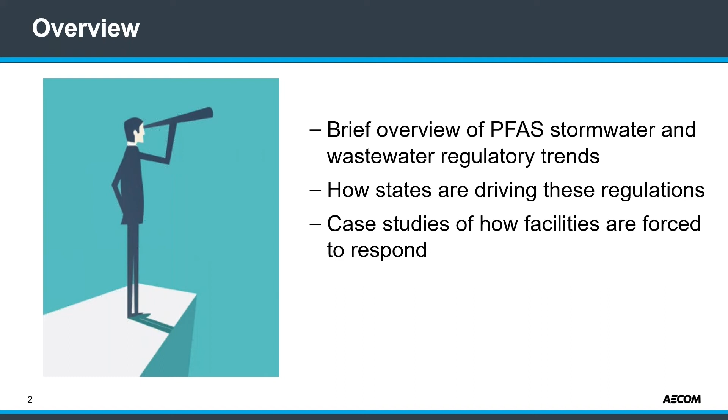So let's jump right in. I'm going to start off at a bigger picture on the federal level with the EPA. The EPA has become more active—their action plan was out a few years ago. It got off to a slow start, but especially with the new administration, things are moving along at a much more rapid pace now.

About a year ago, the EPA came out with this NPDES interim strategy. I'm sure many of you had seen this. This was a document they were discussing internally as they looked forward with how to handle primarily effluent streams through NPDES permits, whether stormwater or wastewater. The recommendations for wastewater discharges were largely best management practices, which could also include treatment. On the stormwater side, they were looking at how to control stormwater and treat it if necessary.

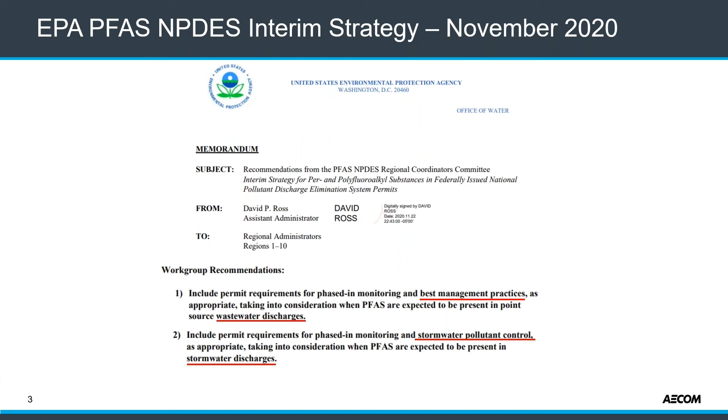More recently, released just a couple of weeks ago, were the preliminary effluent guidelines, this Program Plan 15 by EPA. You can find this in the federal register if you just Google for it. Basically, they're looking at limiting the effluent and providing these guidelines.

If you go through this, it talks about what may be required for monitoring, best management practices, and even pre-treatment standards for wastewater. It also goes through some of the industries they're keying in on and where their focus is, and there are categories too, like for metal finishing, that they're also addressing.

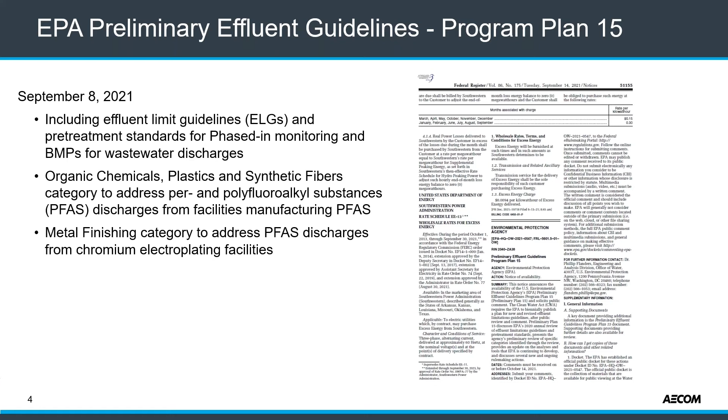I always like to try to figure out where things come from and what happens. Something that kind of went a little bit under the radar was this document that came out by EPA. This is really the background resource to Program Plan 15, and it's actually a pretty interesting document. If you're interested, you can Google this.

I just pulled out one of these tables here. This document goes through and talks about who they're focusing on and why, and specifically what aspects of the manufacturing processes they're concerned about PFAS being in. A lot of this we knew before, but a lot of it is based upon a whole series of studies that have been done in all these different areas. So this is all just to say this is a backdrop.

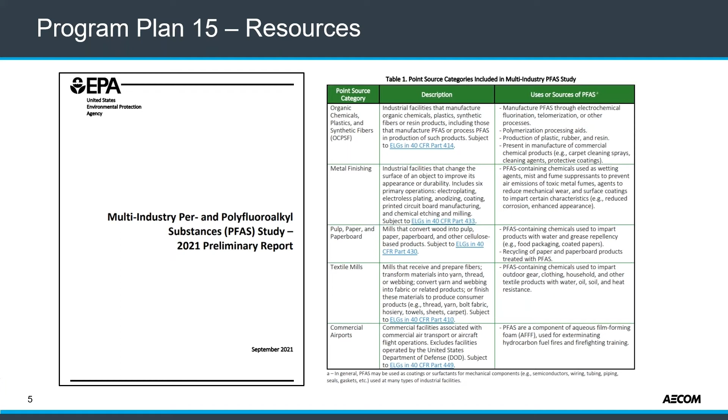On a federal level, this is being looked at, and this probably will be rolling out. My guess is in not the too distant future we're going to have a lot more uniform regulations on NPDES with our effluents, especially the surface waters.

So the federal government is the federal government, and things haven't really been driving PFAS issues as much. I really find that it's being driven a lot more on a state level. The difficulty we have with that is all of these states are doing different things, and some have been very aggressive on PFAS. Some are just becoming aware of it, and some aren't really dealing with it, whether because they don't think they need to based on manufacturing in their states, or they just haven't been pushed to yet.

Here's a figure showing the United States, with a whole bunch of colors - hope it doesn't weird people out. I tried to break this down to show: the gray ones are states where they're not really doing much of anything yet for PFAS. I'm not talking about products or foams, because some states are very active on the product side but not as active on the environmental side.

The green ones are states that are getting close - they're drafting regulations, coming out with recommendations that are in various forms of review or stakeholder comment periods. The dark blue ones are states where there's some sort of PFAS regulation. In some states it may be drinking water, some it may be just environmental, it could be biosolids - it's very varied. So all these states don't have the same types of PFAS media that they're developing criteria for.

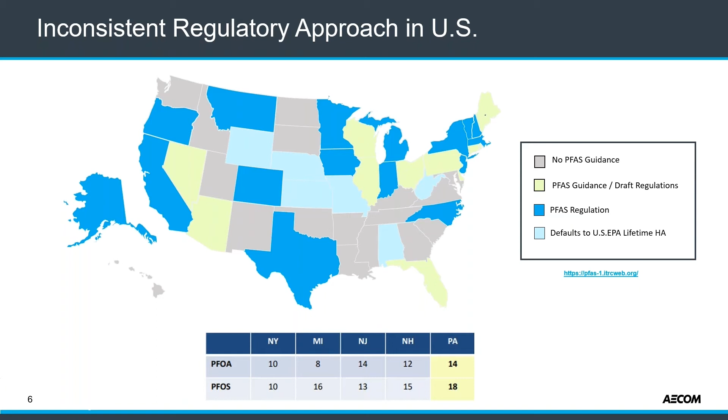A lot of what I want to talk about today comes into this - what people care about most is how are these states driving these regulations and how is this coming about? So for reference, I put on the right-hand side the DEFCON scale. There are three areas I'm going to talk about today, really focusing most deeply on number 2 and number 3.

We all know that many states are now approaching PFAS by facility types. There's been a lot of information out there over the years about different types of facilities and their association with PFAS chemicals and their manufacturing processes - that's been well documented, I'm sure everybody knows that. It's a concern, and it's definitely something that can have a regulatory driver behind it.

But I really think more concerning has been the stormwater effluent and attention now given to NPDES permits - that has a lot of problems for us, a lot of challenges both in assessing that and in how you rectify it. And then there's the one I think is DEFCON 1, which is quote unquote 'war ready' - stuff we're dealing with day in and day out in many states where there are requirements now we have to meet for effluent. That's definitely challenging in wastewater, which I'll get to.

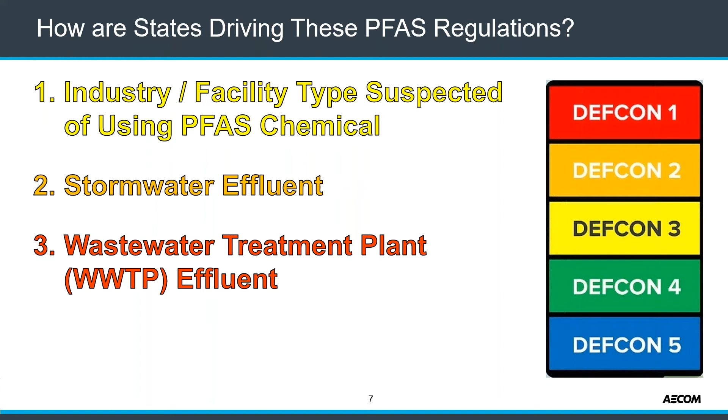Okay, so let's talk a little bit about these facility types. I'm not going to spend a lot of time here, it's pretty straightforward. There are definitely different industry types that have been targeted through research and documentation of what they've done, what's in their waste products already, and what's been used - probably none of these surprise anybody on the call. So many states are developing lists of these different facilities within their states by industry type, and when they have the authority to, they often ask for some sort of sampling to be done at these facilities or evaluation.

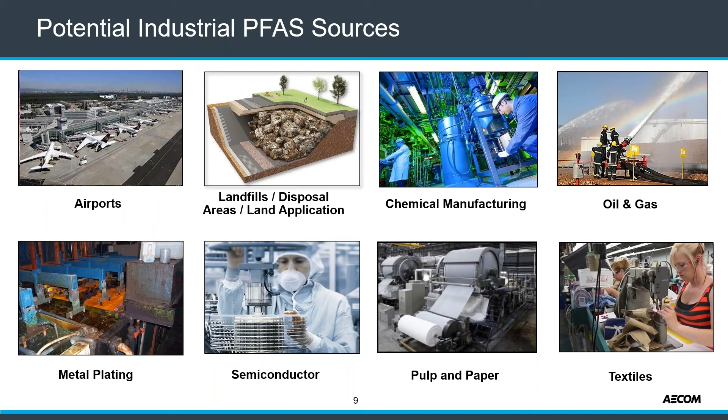A couple examples of this: in California, they entered the PFAS theme a little bit late, but they came at it with a robust charge, rolling out this phased approach. A couple years ago they had phase 1 come out, driven by municipal sampling done throughout the state. I should mention, that's something we need to be very cognizant of - when we see states starting statewide sampling events of municipalities, drinking water, or surface waters, once they get that data, they have to figure out what the source may be and how to get it under control to protect human health and the environment.

So California came at this in a phased approach. First they hit airports and landfills, and they got completely inundated and overwhelmed with the response. It took them a while to staff up and figure out how to attack that. A good year later, all of a sudden they had another order come out for chrome plating facilities - I believe there were over 350 of them that were part of that order.

And again, they had to go out and assess their facilities for past PFAS usage. Generally in the chrome plating industry, that was well known for being a mist-suppressant to control vapors from their employees. It also has historical roots in that industry as well. It definitely had beneficial properties to the surfactants in the application of the chrome to the materials that they were plating.

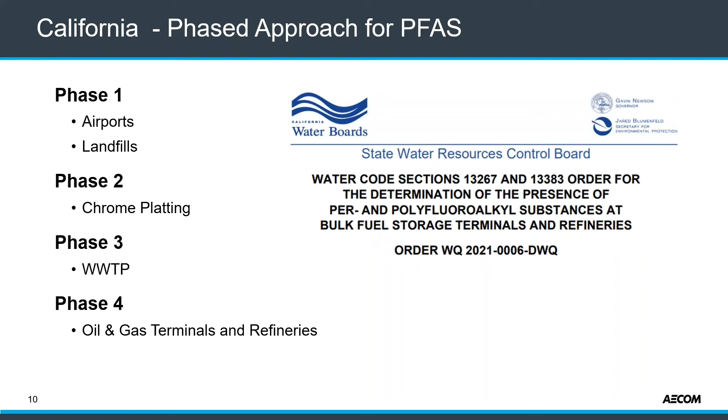And we saw New Jersey just did this year too, where to many of their industrial facilities throughout the state, manufacturing facilities, they put out questionnaires about PFAS, and that one was extremely extensive. I helped many clients navigate through that as well. So this is all just to say that this is becoming an ongoing issue, potentially for how sites can get identified.

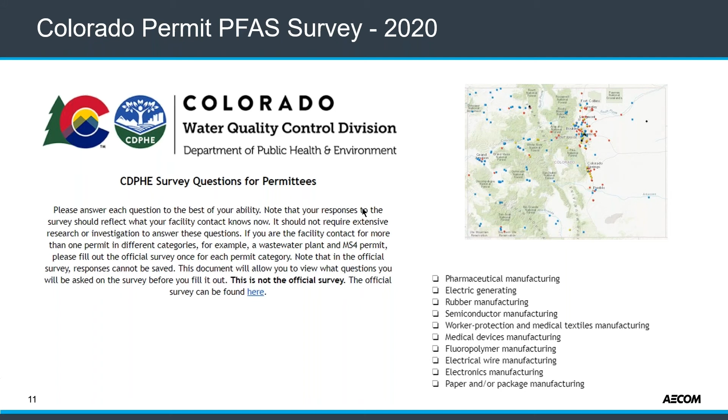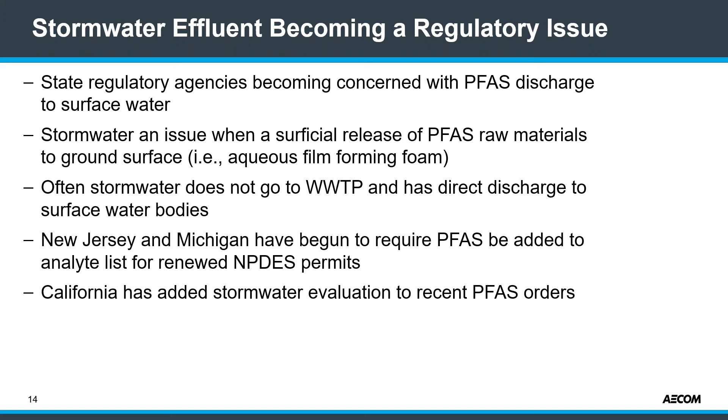And I mentioned California before with their orders. I've noticed that some of the more recent orders are focusing a lot more. They have a very large stormwater component to it, where they do want that evaluated and that stormwater sampled as part of an initial, just a preliminary evaluation. They want the stormwater sampled even prior to you recognizing that you do or do not have a release of any PFAS raw materials at your facility.

So be that as it may, however this ends up in our stormwater, this is presenting a lot of challenges. I kind of joke sometimes, it doesn't seem like anything with PFAS is easy. And we're learning new things every day.

But when you're addressing this impacted stormwater, what options do you have? So options that I've seen and we've implemented at facilities - if we do have impacted stormwater, sometimes we've been able to divert that to a wastewater treatment plant on site. Well, that's just directing it somewhere else, and then we have to put some kind of mitigation in place for that. But sometimes that's a little more of a controlled environment where we can do mitigation if necessary. But that's something that's been done.

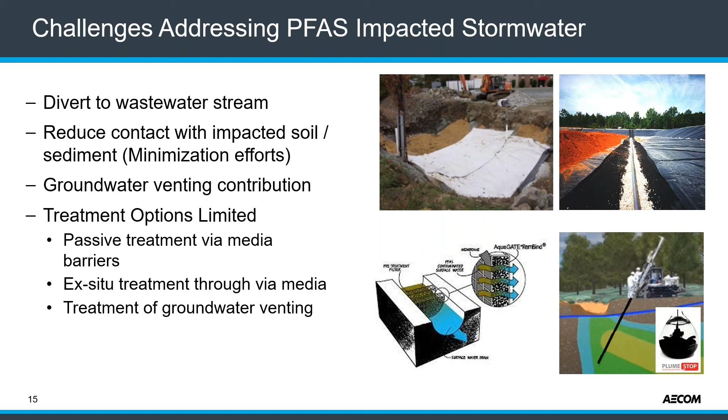And then the last thing we have, which is kind of like everything else, is pulling stormwater out of these culverts and running it through carbon, or fill in the blank, some sort of adsorptive or separation technology to remove the PFAS and then discharging it. Again, none of these are phenomenal answers, but there are ways in which we can do this. This has only been something I'm aware of being dealt with in the last year and a half or two years from a stormwater standpoint.

So one quick case study I have is the Selfridge Air National Guard Base, where we had notices of violation due to an outfall having elevated PFAS concentrations in a stormwater outfall. Those concentrations could be as high as north of 10 parts per billion for PFOS, typically one of the driving constituents in PFAS that we have. So we had to really look at this and do some modeling and figure out where this material is coming from that's getting into the stormwater, where that's migrating, and what the fate and transport looks like, to figure out what we could do to address that.

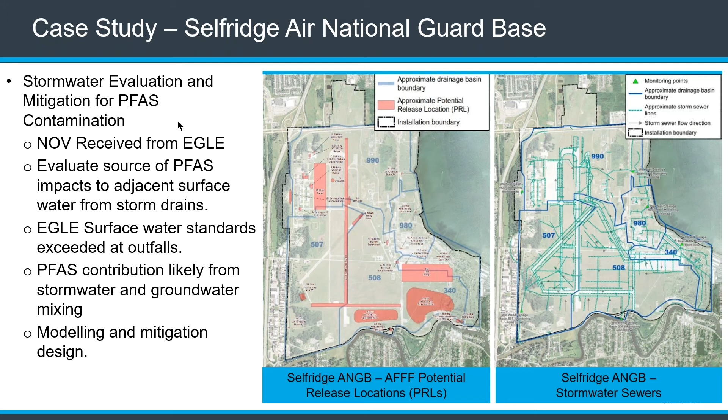So at this particular facility, we are basically removing the water from the stormwater drains themselves, the culverts, and running them through separation media. We're still in a piloting phase on this, trying a couple different carbons and a Fluorosorb as well, to see what type of removal we get with all these, what's more beneficial, what's more cost effective.

Through all this, we need to be minimizing and understanding where the contributions are coming from at the facility, because if we cannot treat the end tailpipe, that's going to be better. We'd rather treat farther upstream and lower volumes rather than handle much higher volumes. The study identified that most of the contribution of PFAS was from 4 individual catch basins, so they're being dealt with individually to take care of that. It's a very interesting project, and the results have been very strong. There'll probably be more documentation coming out on this in the near future.

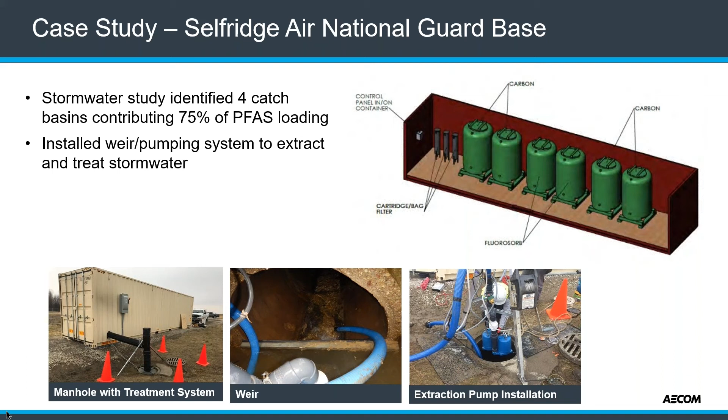So let's switch over to the last topic here, which is wastewater effluent. I'm not going to say Michigan is the state that really drove all of this, but Michigan is the state that I think really came up with a very effective plan to identify where PFAS is getting into wastewater treatment plants.

And obviously the driver is, so this is how it goes: the state has had a surface water quality number for, I think, over a decade for PFOS and PFOA, and the PFOS concentration was 11 or 12 parts per trillion, depending on if it was a drinking water source or not. That was the discharge criteria. So Michigan then went to the wastewater treatment plants and basically told the plants, listen, your discharge from your plants has to meet this.

So we are requiring you under statute to sample your influent and effluent. Basically, if your effluent exceeds, we're requiring you to sample your industrial influent coming from industry to determine if you can find out where this PFAS is coming from. That worked out well from the state standpoint, because it did identify hundreds of facilities in the state of Michigan where PFAS was being discharged to the wastewater treatment plants.

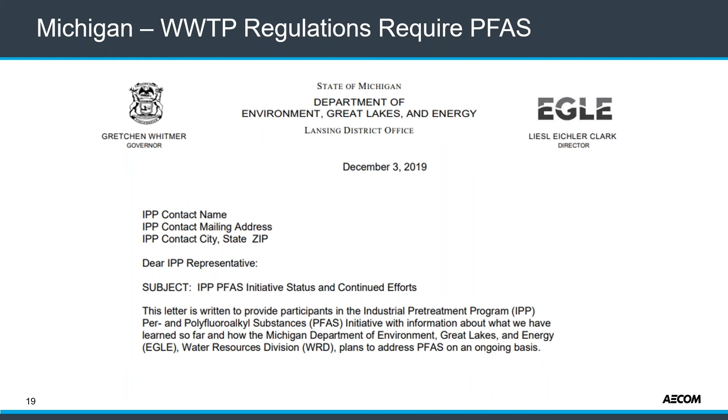So here's a state that had a regulatory driver for it. Many states really started to try to develop and model a program similar to what Michigan did, and Wisconsin was one of them. A while back, Wisconsin tried to model this, and they put out basically a request for wastewater treatment plants to sample their influent and effluent. Wisconsin does not have a regulatory driver yet. They're working towards that - their regulatory process for developing new criteria is very onerous. It takes a while. It'll probably be within a year, sometime early next summer, when that promulgation process will come to an end and they'll be able to actually have the driver.

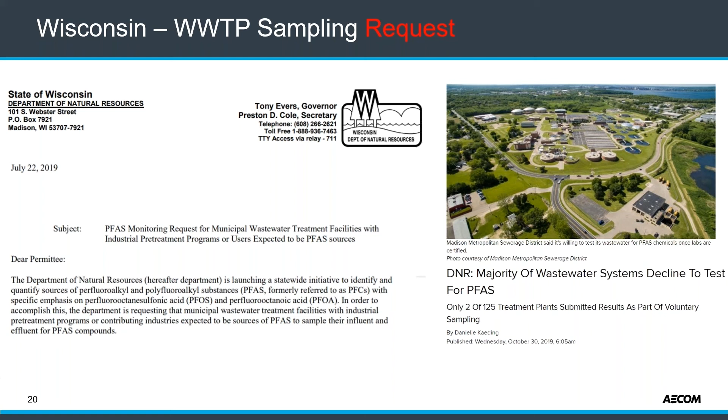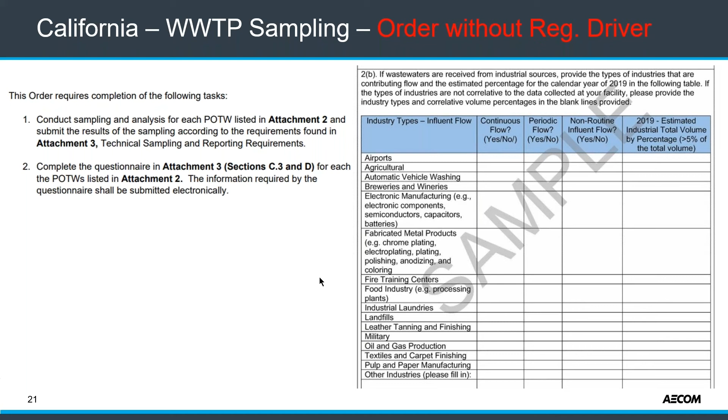And again, I mentioned earlier the California wastewater sampling. They're requiring this without necessarily a regulatory driver for it yet, because data's being collected and nobody really knows in California what we're comparing it to at the moment, be that as it may. But you can see this huge list of who they want you to target if you have issues in your water, and they're already teeing this up for all these wastewater treatment plants there. So that's definitely problematic for industry, not knowing when this may just become your problem.

So how do we address these issues within our wastewater? I think there's a lot of keys that need to happen with that. There's a lot of challenges.

First, we really need to identify what the contributing sources are in the facility. Do we know which parts, and some facilities are quite large, have PFAS, or had historical PFAS that's just impacted equipment that's still discharging? Can we isolate that and understand where that is within the facility? And then if we do, are there minimization efforts - things we could do to stop that PFAS from being discharged to this stream?

Sometimes that may be difficult. Part of that minimization effort too may be looking at alternative products or materials that could be used in your process that don't have PFAS, or at least don't have the PFAS that have been found to have environmental concerns. There's also the cleaning of equipment.

We run into this a lot where, once PFAS, especially a raw material, hits your equipment - let's say, for example, in chrome plating, in those acid baths where this was sprayed on top of - it's virtually almost impossible to remove PFAS from that equipment itself. Many facilities are faced with either treating an effluent coming out of their facility or replacing all of their equipment. These surfactants tend to bind into things, whether it's metal or concrete. This could also be for your wastewater treatment plant piping or your wastewater piping at your facility, which can become impregnated with that too.

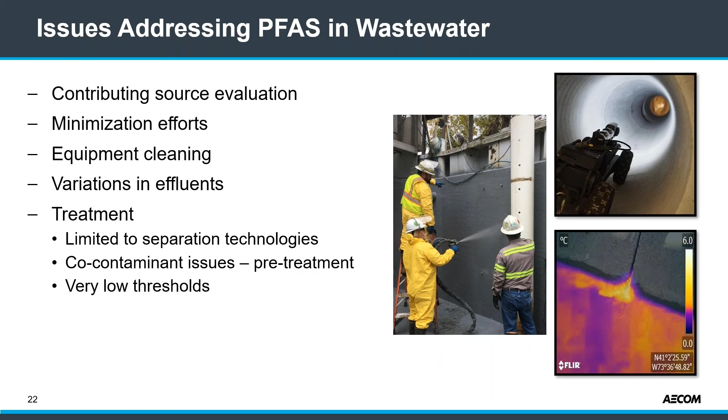So I have a case study on this - I've used this for a little while, it's a good small case study to talk about. We had been working at this former chrome plating facility for a number of years, and we had a groundwater extraction system pumping out groundwater leaving this former facility and sending that water to the wastewater treatment plant for treatment of chromium and nickel primarily. The wastewater treatment plant would knock out all the metals, and everything's good, and we have a capture protecting these down-gradient residents.

This was in a state where they required the wastewater treatment plant effluent to meet the state's criteria. It didn't, so they sampled their influent streams, and sure enough, this influent from the groundwater extraction system where we were knocking the metals out had 8,000 parts per trillion PFOS during that sampling. That led to a cease and desist letter from the wastewater treatment plant, giving them a timeframe - basically you have 45 days to rectify this, or you can no longer discharge.

So we had to move very quickly to put in a GAC system that had some resin in it to knock out metals as the pre-treatment. We ran a sacrificial carbon on the front end, regenerated carbon, and then went to full carbon for polishing on the back end. We had to build that and have it in place within 30 days, and we were able to rectify that. We can do this - it's been running for over 2 years now with our effluent at less than 2 parts per trillion.

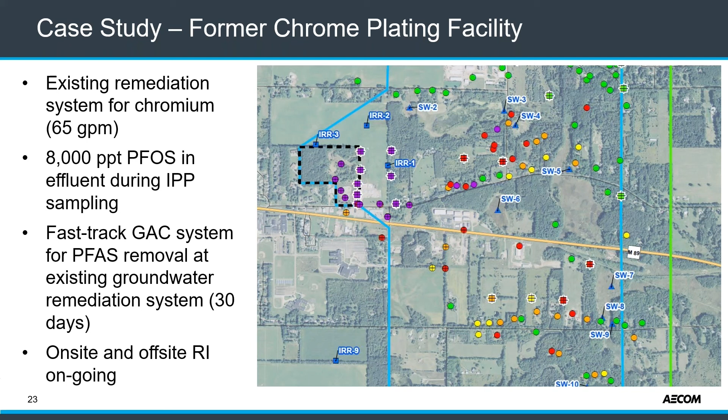But then this leads to a whole host of other issues where we had down-gradient residential wells with elevated concentrations we were dealing with. We're doing this off-site investigation - we got discharge to surface water bodies. And just to make it fun, right next to the facility we have a dairy farm, so they had water going to cattle. We had a bunch of irrigation wells. So once PFAS comes to you, you kind of lose control of it, and these are some of the issues we're stuck with.

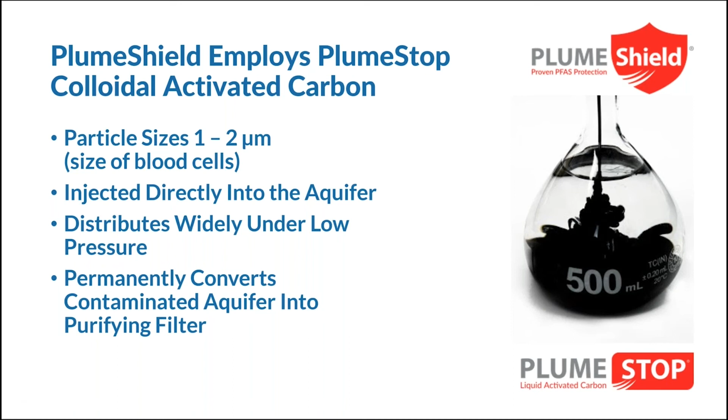We've actually targeted this very well right into the flux zone. So now you're stripping all the PFAS out, and down gradient to the left, you've eliminated any risk of contamination.

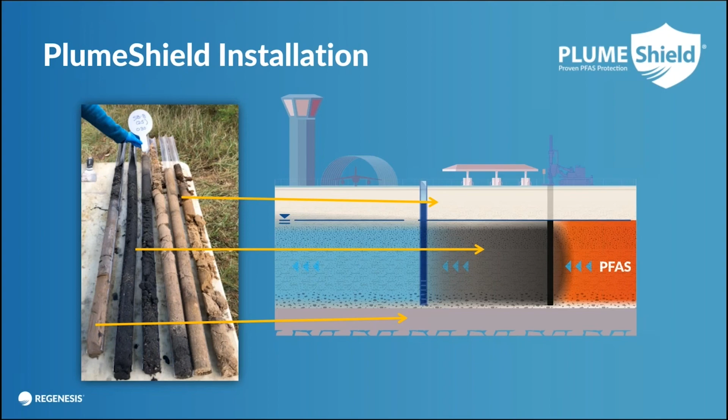So you're protecting the wells to the left of the barrier. We call it a barrier, but it's actually just a permeable barrier, a filter zone. And all of the PFAS is being stripped out, and you have clean water impacting those wells. So you're protecting the homes to the left with their domestic water supplies.

So one of the questions that comes up is, are you really performing remediation since you're not just removing the PFAS? Instead, the PFAS is simply sorbing onto the Plume Stop in the subsurface.

Well, remember that risk is equal to hazard times exposure. And by putting the Plume Stop in the subsurface, it rapidly sorbs the PFAS. And by doing that, you eliminate the exposure because it's no longer moving. And by eliminating the potential for exposure to down gradient, you are in fact eliminating the risk. And by eliminating the risk and cutting off the path and route of exposure, you are successfully remediating the site.

And that meets the criteria for the definition of remediation per the ITRC, the Interstate Technology Regulatory Council, if you're familiar with the regulatory group that is really on the leading edge of policy for PFAS.

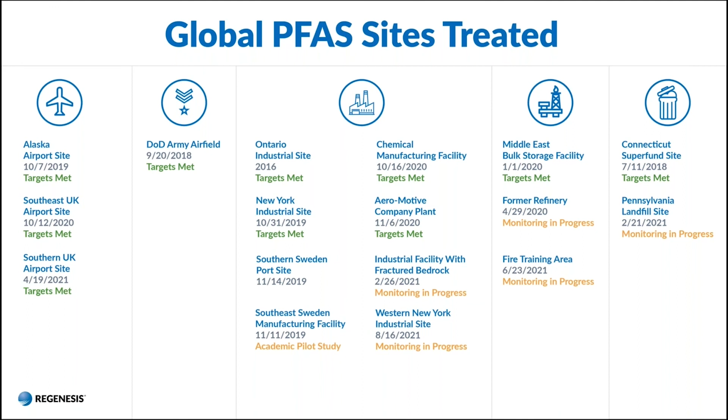So let's review what the process really is here. The Plume Shield program, REGENESIS will evaluate and provide a lump sum price. So this isn't for every site, but on the vast majority of sites where there's a reasonably well-defined PFAS plume, assessed by a competent engineering firm, we will be able to take this on under the Plume Shield program, where we'll evaluate the data and provide a lump sum price.

Once that lump sum price is accepted, we will perform all of the installation and commissioning. And only when the performance criteria are met in the key monitoring wells does any money exchange hands. So we are so sure of this technology and confident in our ability to execute it that we're willing to move forward on our own nickel. And with it comes a standard 10-year warranty.

Longevity of Plume Stop to treat PFAS is estimated on the orders of decades. If we put in a really robust injection, we feel confident in most sites stopping PFAS and tying it up for decades and decades.

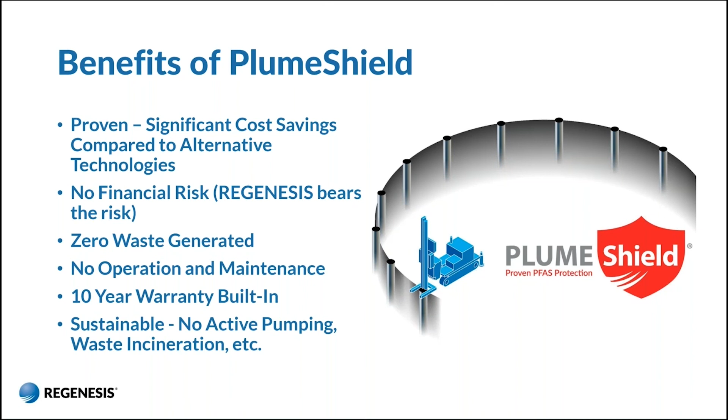And that's if the source is not removed and there's a continuing influx of contaminants. However, if the source is treated, as John was showing—covering, capping, putting membranes over sources, or removing the sources—those plumes will have a declining input to the plume shield barrier. In those cases, we think one injection of plume shield may last forever.

If there's a declining source, that plume shield will probably absorb the contaminants, and you'll have very, very little ever migrating out of that zone. If it does migrate out over decades, it'll be below regulatory standards in some cases, so you won't have to do another injection. So there you have it.